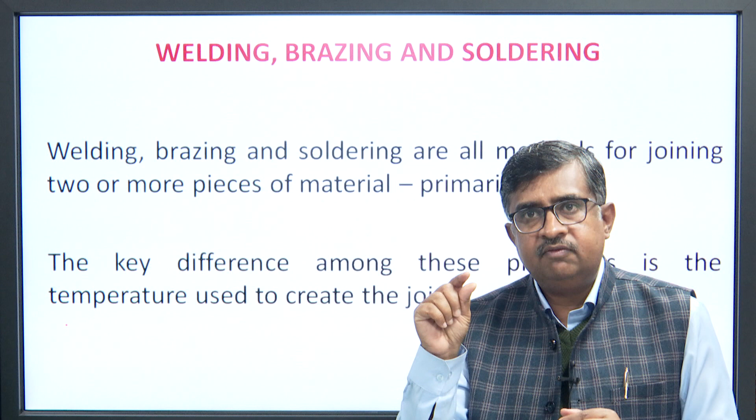So how is welding different from brazing and soldering? It all depends on the type of material we are taking, the thickness of the material, and the temperature we are working on.

So we all know welding - what is welding? For the majority of processes involved, welding involves melting of the base material to create a joint. Welding may or may not involve the use of filler material, or it may use shielding gases as and when required.

Whereas in brazing and soldering, the essence is the same in that they both melt the filler material - like braze and solder only - not the base material. So this is the basic difference, not the base material.

The liquid filler material wets the base materials through capillary action. When the liquid filler material solidifies, it bonds the base material, creating a joint. Remember, in welding we use filler materials or shielding gases; here nothing like that - through capillary action we do this brazing and soldering, and when it solidifies, it bonds the base material and creates a joint.

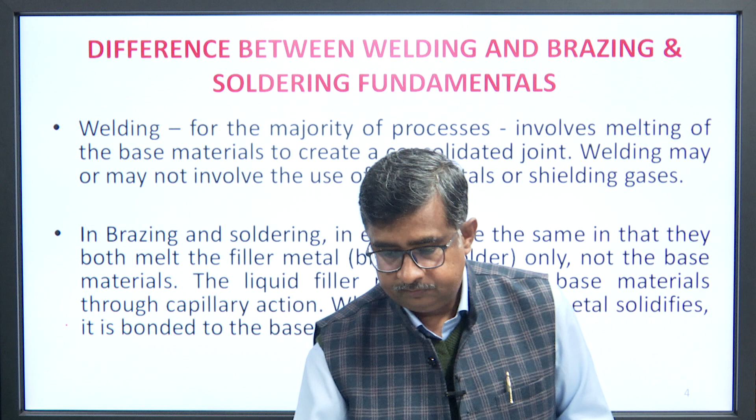So I already said this is a low temperature method of joining two materials. So regarding the temperature range of welding, brazing and soldering - when you see that scale, you will understand the difference in temperature range we follow for soldering, brazing, and which range we follow for welding.

Solder alloys with melting temperature below 840 Fahrenheit are considered soft, and any soldering done above 840 Fahrenheit is referred to as brazing or hard soldering, also called silver soldering when a silver alloy is used. As for welding, the processes occur much higher up on the scale, at more than 5000 Fahrenheit and up.

Students, you have to remember that on a temperature scale there is a large difference. Brazing, soldering and hard soldering depend on temperature. For higher temperature we say hard soldering, which is nothing but brazing, but when you go above 5000 Fahrenheit, then it is welding. So you have to choose the particular material which can come under this section.

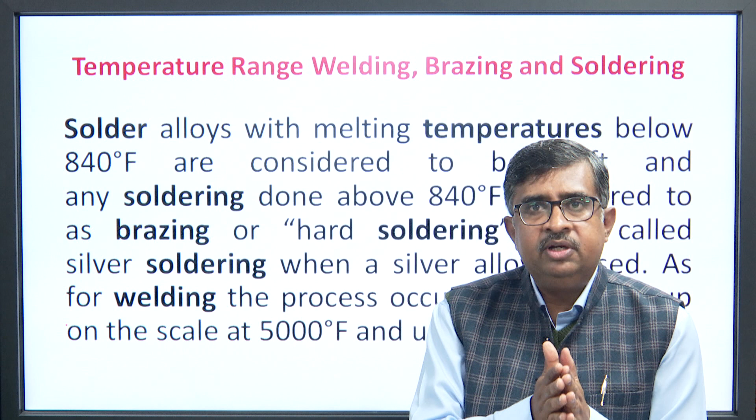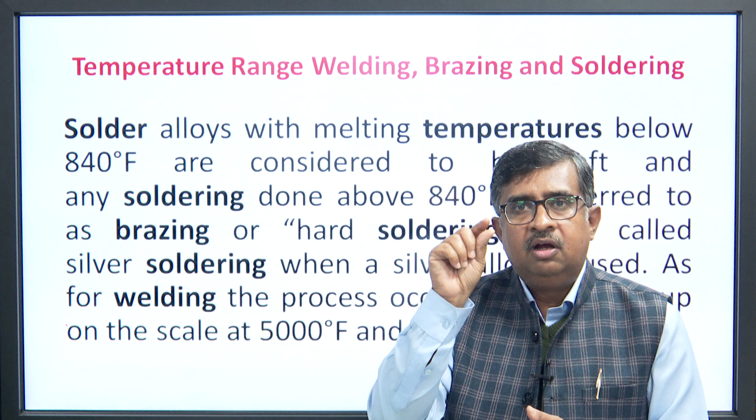When I say it is a low temperature phenomena, this low temperature joining phenomena means you will take thin sheets and then do the welding. For your understanding, you must have seen radios or TVs, PCB sheets in which microchips, capacitors, resistances are joined. So when you are joining that capacitor, you are basically doing hard soldering or soldering, whatever type of component it is.

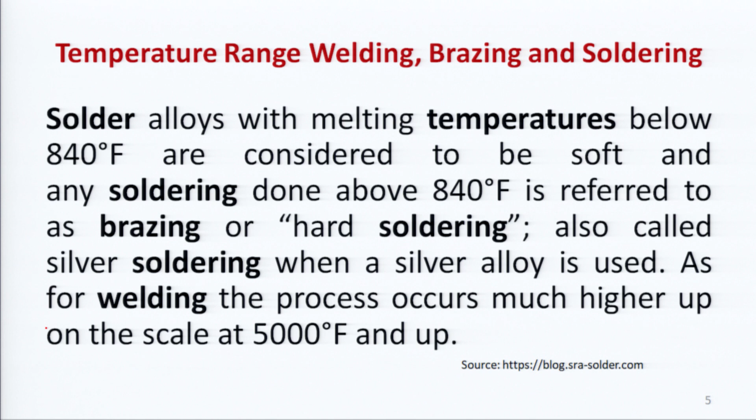So the application - just for your understanding purpose I have taken this example, so that you can understand it better. I will show you a temperature scale which will let you know.

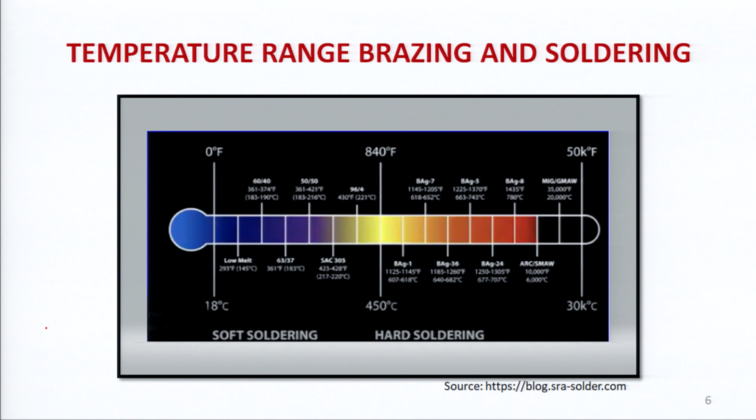And for welding, if you go above that scale, that is 50K Fahrenheit or just near about, it means you are dealing with very high temperature, and that will be the portion of welding, which is on a scale you can easily understand. So, that is a major difference.

When anybody asks you what is soldering, brazing or welding, what is the difference, you have to tell that the basic is the thickness of material. The difference is that you take thin materials in that, and definitely the temperature scale what I have shown is the major difference between welding, brazing and soldering. In fact, brazing and soldering lie in one family and welding lies in a different family.

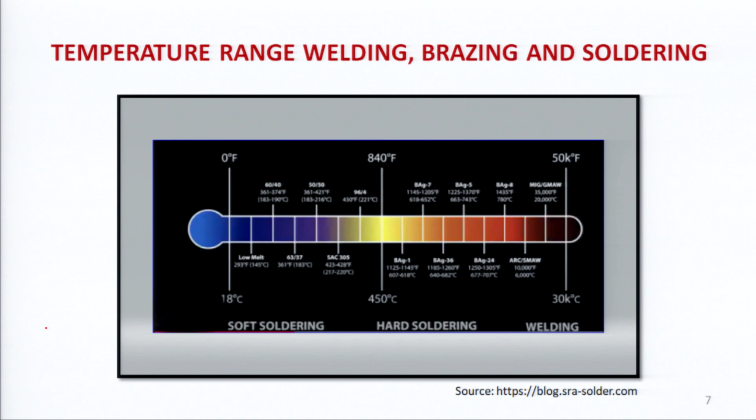So, what is soldering, or how we can understand soldering, and what we have to do? Students, solders are melted using heat from a temperature controlled soldering iron. The solder melts at a temperature below 450 degrees Celsius.

A flux is used in soldering to clean the metal surface, allowing easier flow of the liquid metal over the base metal. So, whatever base material you are working on, the liquid flux is used, so that the upper surface of the material can be cleaned.

Base material suitable for joining by soldering include brass, copper, iron, gold and silver. Filler materials used in soldering were once lead based. However, regulations are there nowadays. Lead base has been replaced by non-lead versions, which may consist of bismuth, copper, indium, tin and silver. So, because of the hazardous output of these lead based fluxes, we have replaced it.

And nowadays these materials, like bismuth, copper, indium, silver, tin, are used according to the application we are doing. If it is a very sophisticated soldering, and it is part of a very sensitive part, then silver soldering is used. It depends on the type of application we are doing.

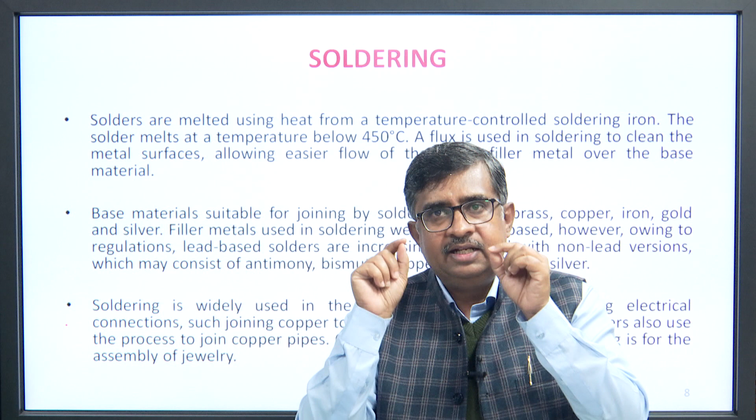So, soldering is widely used in electronics industries, I already said, for making electrical connections such as joining copper to printed circuit board PCB. That is one thing I think each student must have seen in his life, that PCB board, that is the green board on which different components of electronics are soldered. So, that is done, and that is again the joining of components or joining of the material, because at the end it is a joining of material only. So, soldering is very very important and effective there.

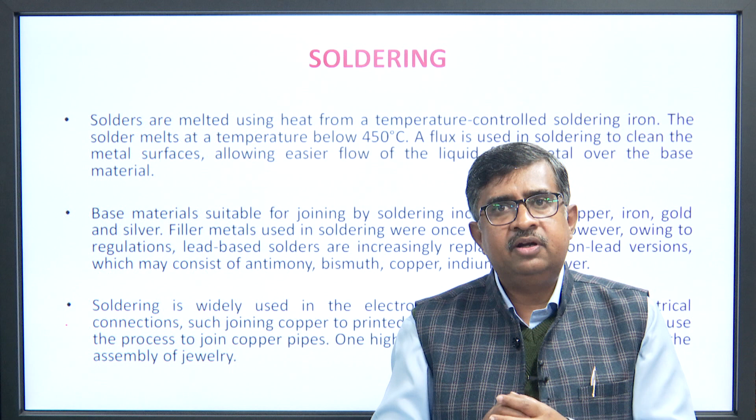Advantage of soldering: having a lower power input and processing temperature compared to welding and brazing. This has an advantage over welding and brazing. You are using low temperature for the process, and that can easily join the component. If you increase the temperature, the chances are there it will spoil the surrounding area where the material or the component is joined. Being able to join dissimilar base material, that is one advantage.

Being able to join thin walled parts, having minimal thermal distortion and residual stresses in joint. Students, whenever we use high temperature, material will undergo a typical type of stresses, that is it may be tensile stresses and compressive stresses when it cools down. So, if you use a very high temperature on a PCB board, then your PCB board will get spoiled.

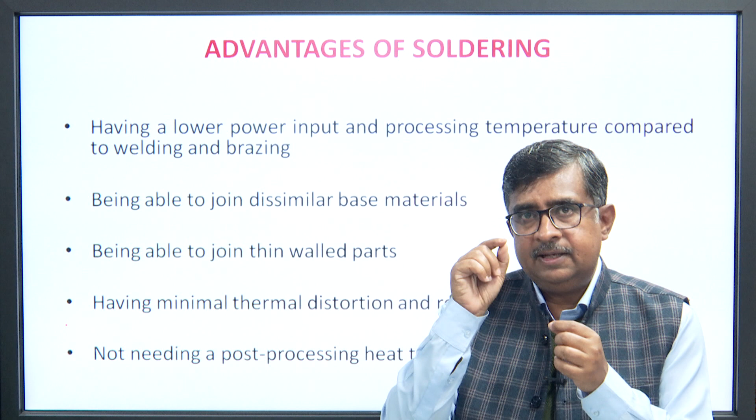So, if we did not have a soldering method, then it could have been difficult for all of us to get those electronic gadgets. Because it is concentrated in a very small area where the component welding or soldering or joining is going on, it has the least effect on other nearby parts.

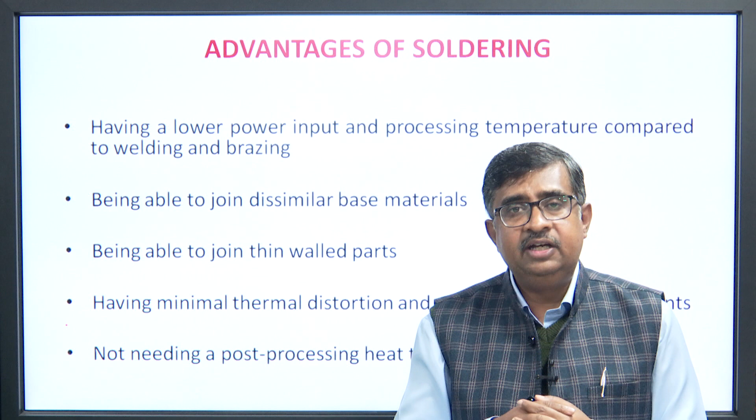Not needing a post processing heat treatment. So, we do not need these things after doing the soldering. So, these are the advantages, students.

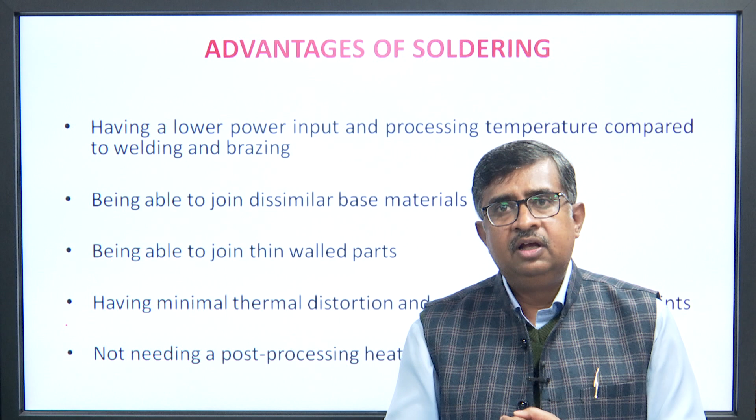There are disadvantages too, because everything which has some positive also has some negative aspects. Producing lower strength of joint compared to welding and brazing, making them undesirable for load bearing applications.

I already said that it is only concentrated to a very confined area where the two materials are joined, where the component is joined with the help of soldering. So, if you apply a load, suppose that PCB circuit, you are having a resistance soldered on it, so if you start moving it, it cannot bear the load. That is the disadvantage of soldering.

It may break, or sometimes if high temperature or high current goes into that PCB circuit because of some wrong connection, then definitely that component, because of that intense heat, breaks or fails.

So, it has a very less load bearing capacity. It is not able to join large sections, you have to concentrate on a very small confined area. It produces joints that are unsuitable for higher temperature applications.

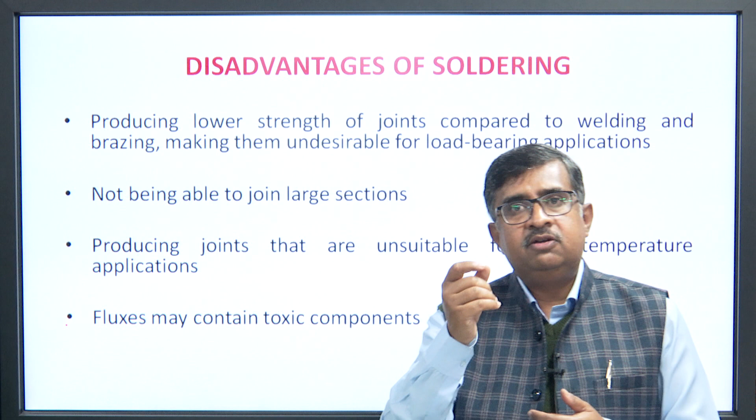I already gave the example that if a high current, due to any reason, goes into the PCB circuit, it may spoil the circuit. When I say spoil the circuit, it spoils the welding joints, the soldering joints, and because of this reason, suppose the cost of that PCB circuit is very high, it will spoil the whole equipment.

And fluxes may contain toxic components. Earlier we used to have lead type fluxes, and when we use lead type fluxes, it was toxic. So sometime or other, if we are using lead type fluxes, it will be a disadvantage for our health. Now new fluxes have come, and we can replace those lead fluxes with them, but it increases the cost. So remember students, these are the disadvantages of soldering.

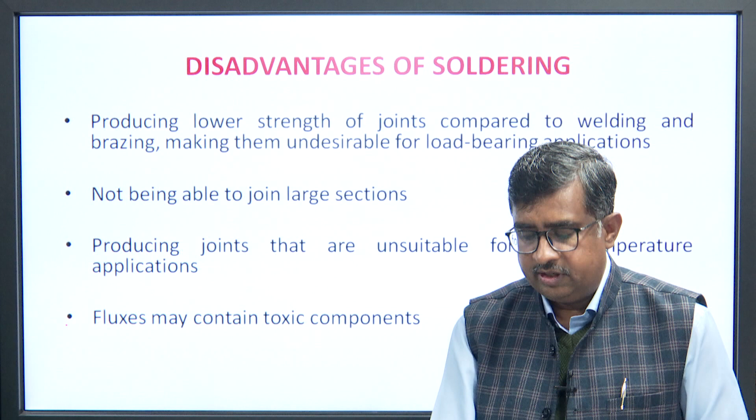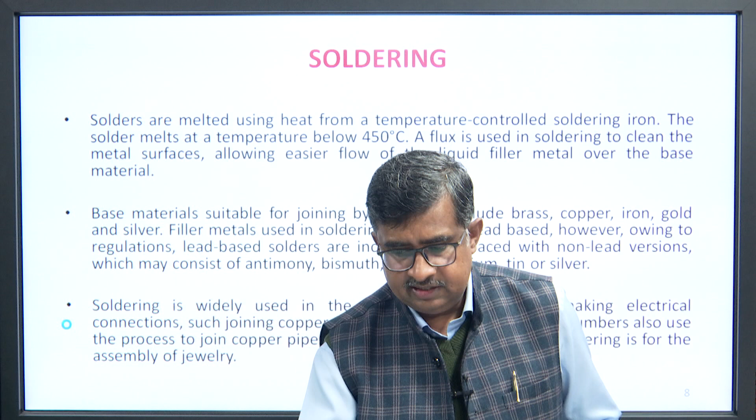Now, how is brazing done? Brazing is considered as a high temperature version of soldering. When I showed that temperature diagram earlier, I showed hard soldering in that slide. So brazing is nothing but hard soldering done above 840 Fahrenheit.

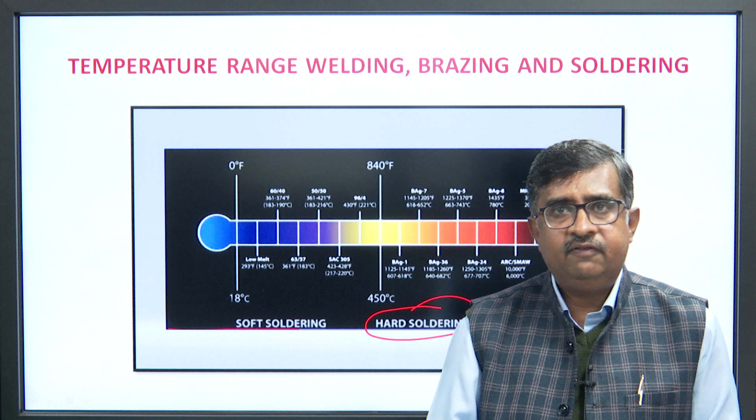I will quickly come to my slide. So, brazing is considered as a high temperature version of soldering. There are several brazing variants, including torch brazing, vacuum brazing, furnace brazing, and induction brazing. Regardless of the type of braze, filler metals melt at a temperature above 450 degrees Celsius, but always below that of the base material to be joined.

The filler metal, while it is heated slightly above the melting point, is protected by a suitable atmosphere, which is often supplied by the flux, as with soldering, which also helps clean the metal surface. Base materials suitable for brazing include aluminum, copper, gold, nickel, silver and steel.

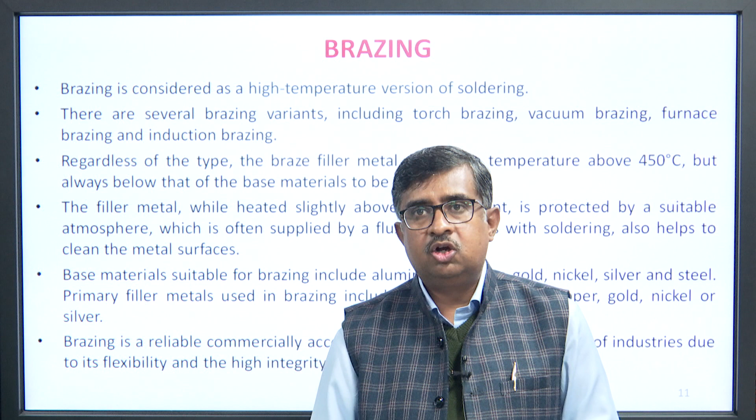Primary filler materials used in brazing include aluminum, cobalt, copper, gold, nickel or silver. Brazing is a reliable, commercially accepted process used in a wide range of industries due to its flexibility and higher integrity with the joints that may get produced.

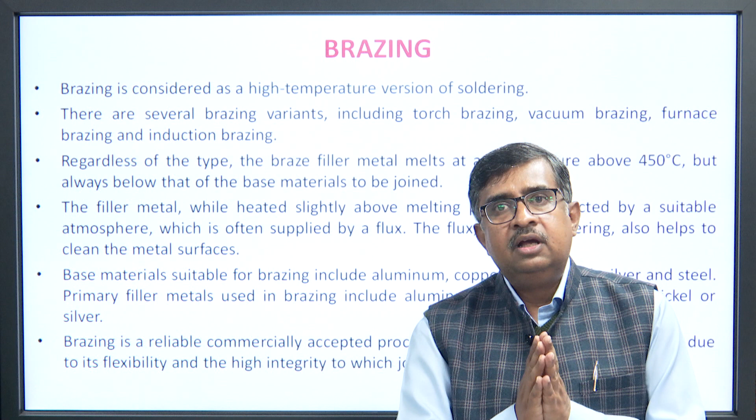So remember, when we do soldering, it is concentrated to a very small confined area, to one or two components, but those joints are weak. But here, when you work at a higher temperature, more than 840 Fahrenheit, or 440-450 degrees Celsius, then brazing is a reliable, commercially accepted process.

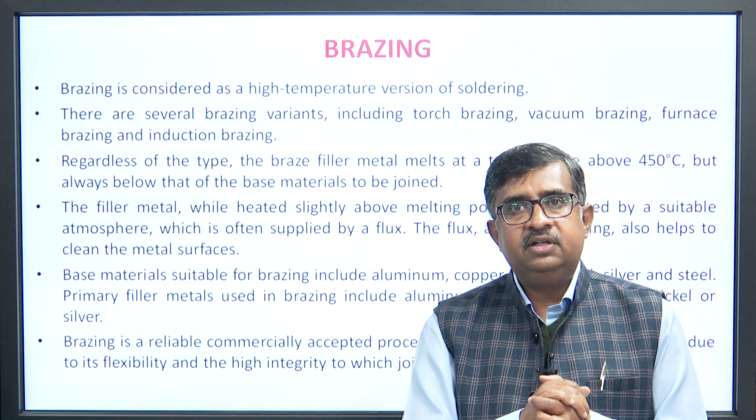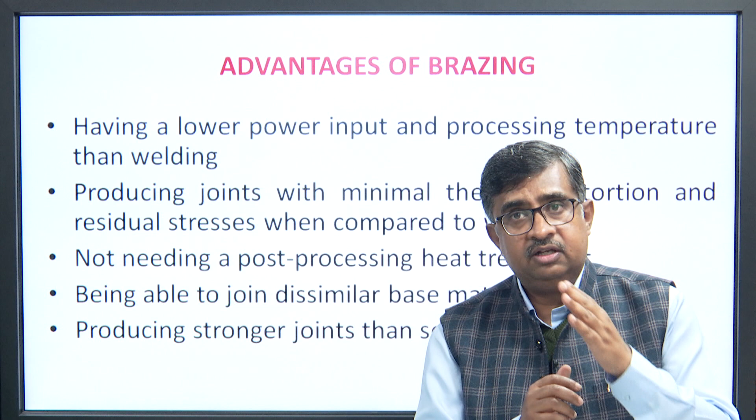It has certain advantages over soldering. Advantages of brazing: students, I have told you that if you work at a very low temperature, then definitely the type of joint produced will be weaker in section, and will fail easily under load. But in brazing, you can have control over this.

Having lower power input, and processing at a temperature higher than soldering but lower than welding, produces a joint with minimum thermal distortion and residual stresses when compared to welding, not needing post-processing heat treatment, being able to join dissimilar base materials, and producing a stronger joint than soldering.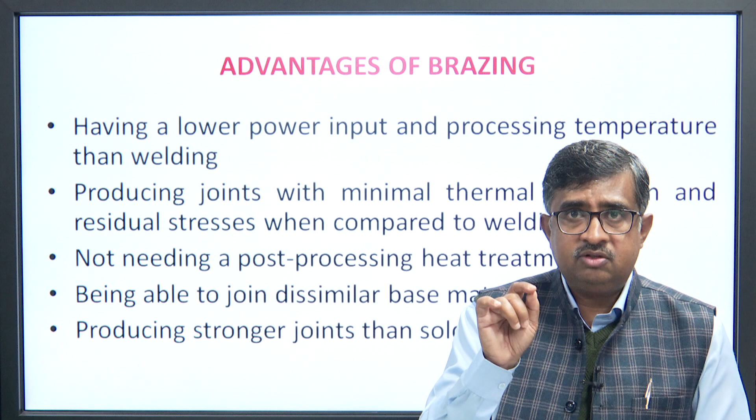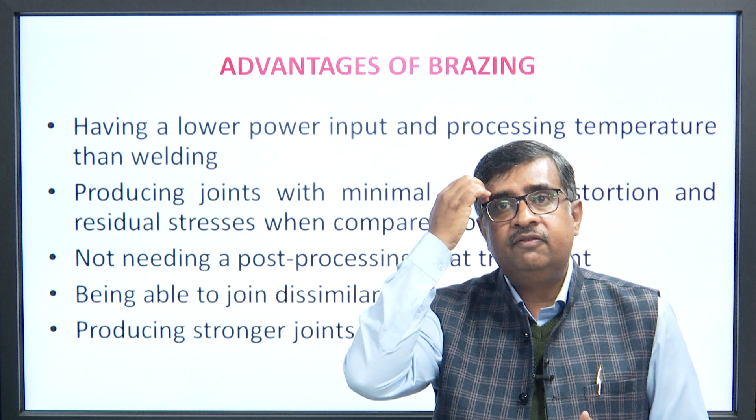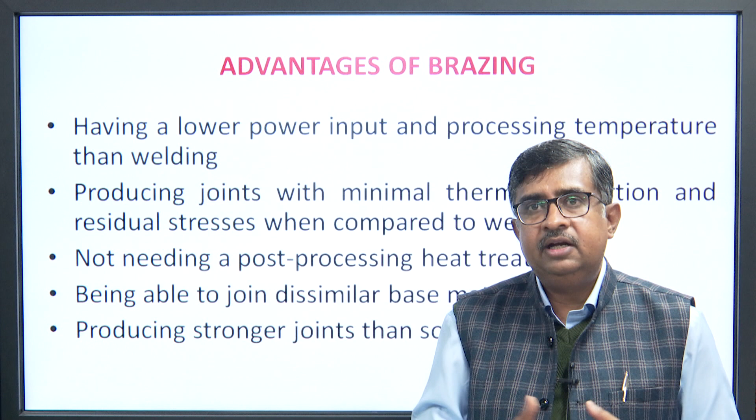That is what I was saying, that is the major advantage of going for the brazing operation. Remember students, it has more applications than just joining PCB components. You can weld artificial jewelries, you can weld decorative pieces. It is also used in many areas of welding, such as refrigeration units, where it is used to weld copper pipes. So seeing these advantages, brazing has an upper hand over soldering.

Disadvantages of brazing: it produces lower strength joints compared to welding. That is because brazing is done at a lower temperature than welding, so definitely the strength of the joint will be lesser than welding. It produces joints that are not as well suited to high temperature applications as welds. Fluxes may also contain toxic components, as already discussed, but these can easily be replaced with non-toxic lead-free fluxes.

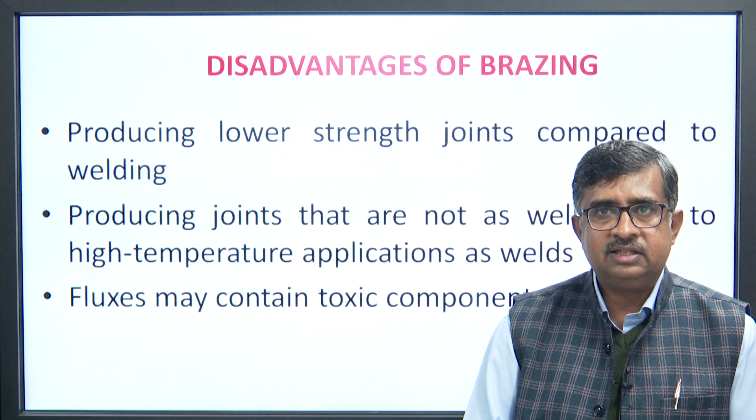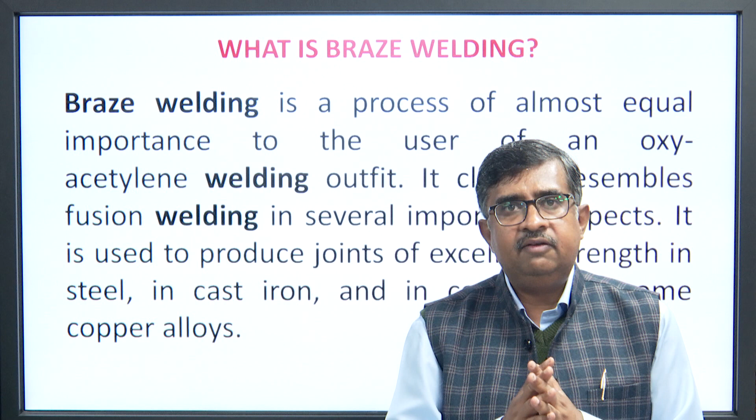So, what is braze? Students, in your syllabus there is one topic known as braze welding. Braze welding is a process of almost equal importance to the user of an oxyacetylene welding outfit. It closely resembles fusion welding in several important respects. It is used to produce joints of excellent strength in steel, cast iron, copper and some copper alloys. So almost similar features, but done at lower temperature.

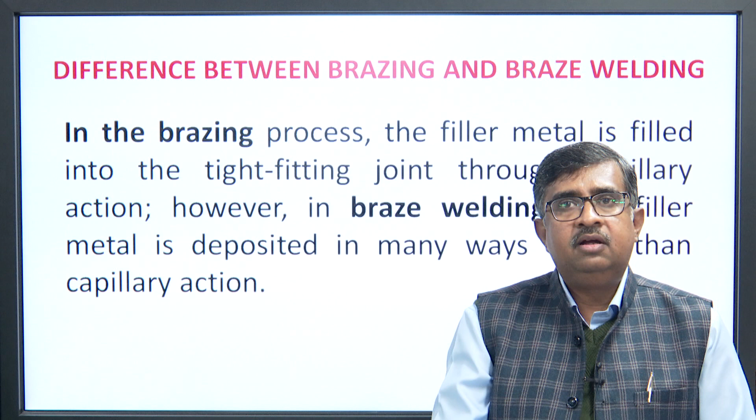The difference between brazing and braze welding is very important to understand here. In the brazing process, the filler metal is filled into the tight fitting joint through capillary action. However, in braze welding, the filler material is deposited in many ways other than capillary action. So this is the main difference. Capillary action means, you must have seen that if you put a pipe in liquid, the liquid will go up. That is capillary action. So this is the main difference between brazing and braze welding.

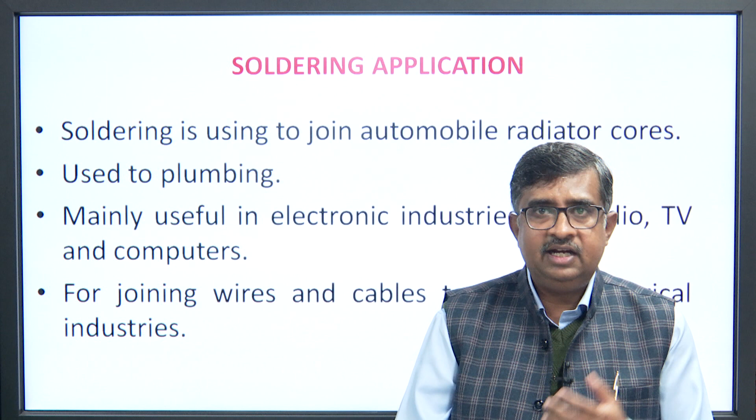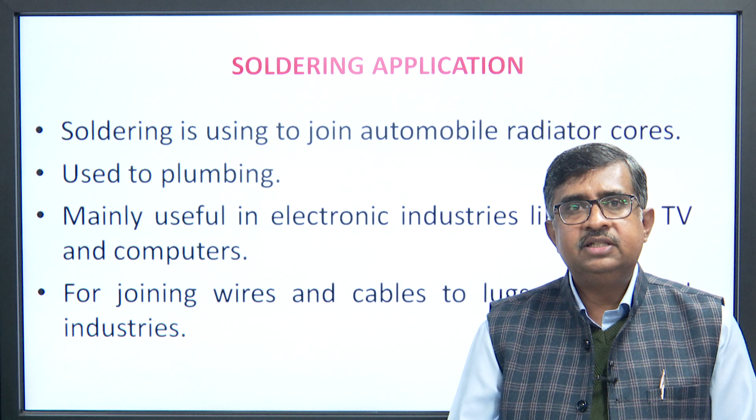Soldering applications are used to join automobile radiators, used for plumbing, many useful electronic industries like radio, TV, computer industries, for joining wires and cables, and electrical industries. So these are the wide applications of soldering which are used in the industry.

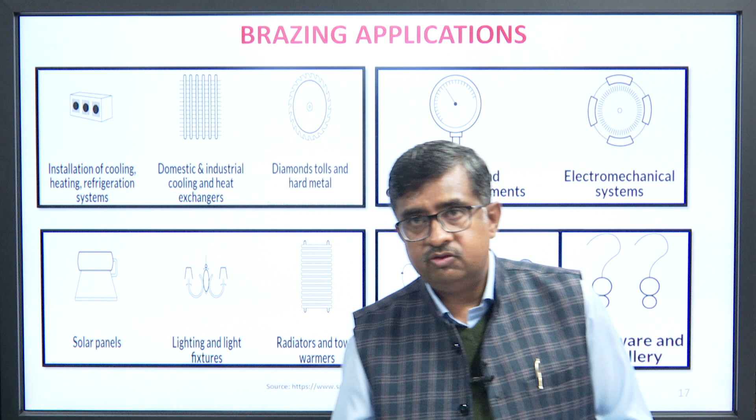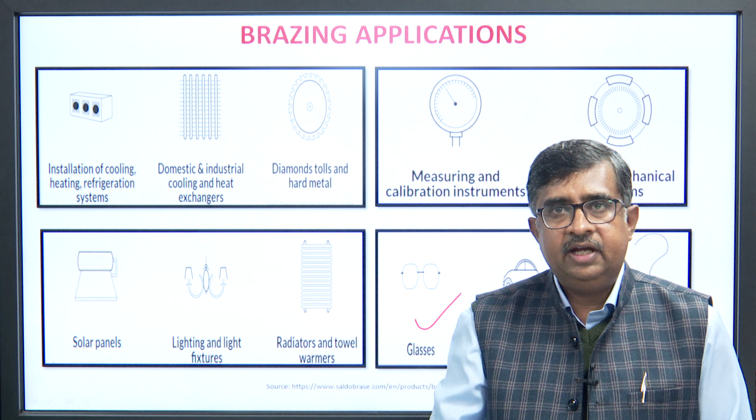So these are the applications of brazing. You may see many uses I have shown. Some of them are solar panels, lighting and light fixtures, measuring equipments, electromechanical systems, jewelry, automotive, and glasses/specs which we wear. So these are the wide applications of brazing.

Underwater welding is an important topic, something different from brazing and other welding, so brazing, soldering, and this is a different topic. It is in your syllabus, so I have to cover it here. Underwater welding is an important tool for underwater fabrication work.

Basically, in the global scenario, you see a lot of oil rigs have come up in the last 20-25 years, and sea activities and ship activities have increased. These are all made from materials that need repairs. When you are developing an oil rig, you need to go deep under sea and weld these things. So underwater welding is done in the same way as whatever welding we have studied, but underwater welding has gained popularity when...

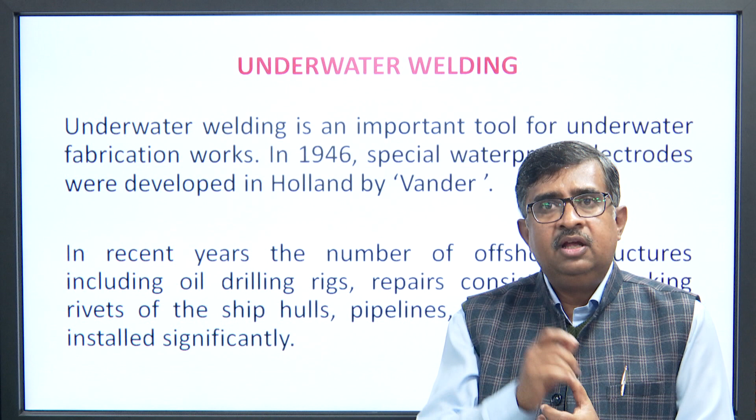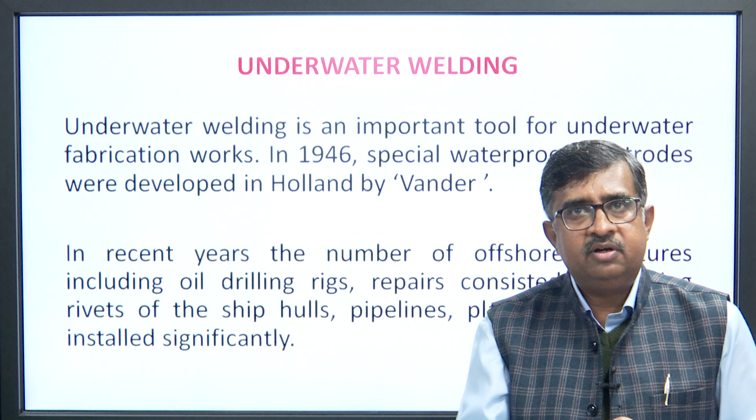...waterproof electrodes came. If you see the technology, students, these underwater welding techniques have been taken up by the industry when these underwater electrodes came, and that happened because of the demand, like oil rigs you have to make in the ocean. So when you have to make these in the ocean, you need to develop a structure, and that is done only by tightening nuts and bolts, and by doing welding. So this underwater welding is a very important topic.

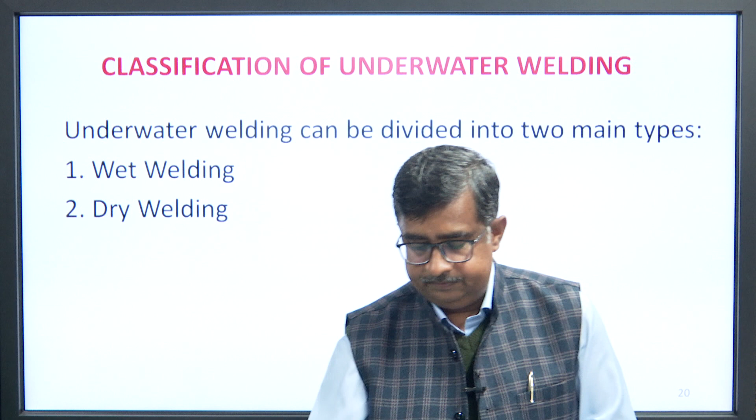There are two types of underwater welding: wet welding and dry welding. The wet welding process is carried out at ambient water pressure in which the weld is exposed to water. This is carried out by a special waterproof stick electrode with no physical barrier between water and welding. This increases the freedom of movement, making wet welding the most effective, efficient and economical method.

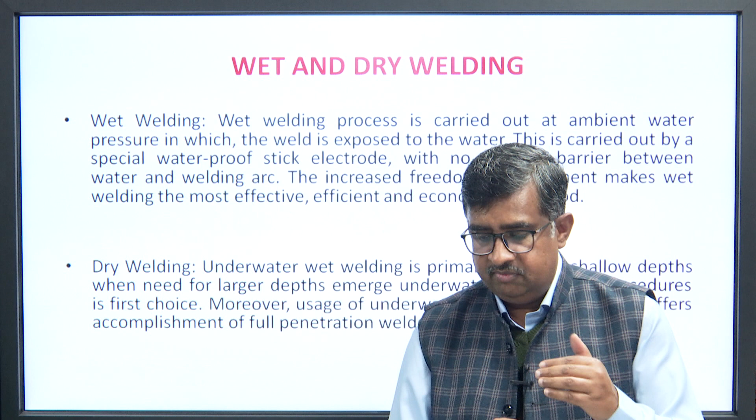Dry welding, or underwater wet welding, is primarily used at shallow depth. For larger depths, underwater dry welding emerges as the first choice. Moreover, the use of the underwater dry welding method offers accomplishment of full penetration welds.

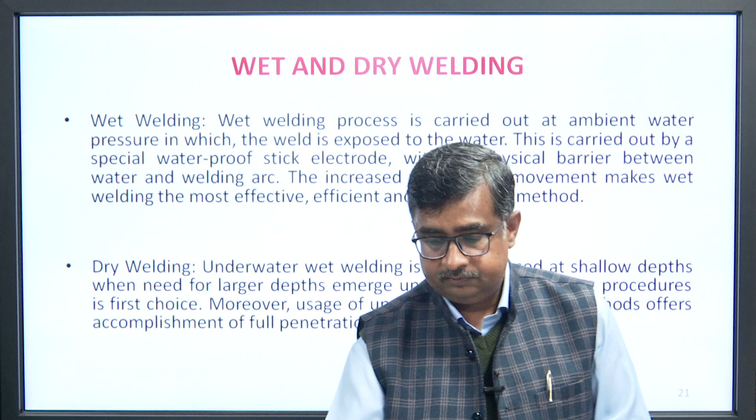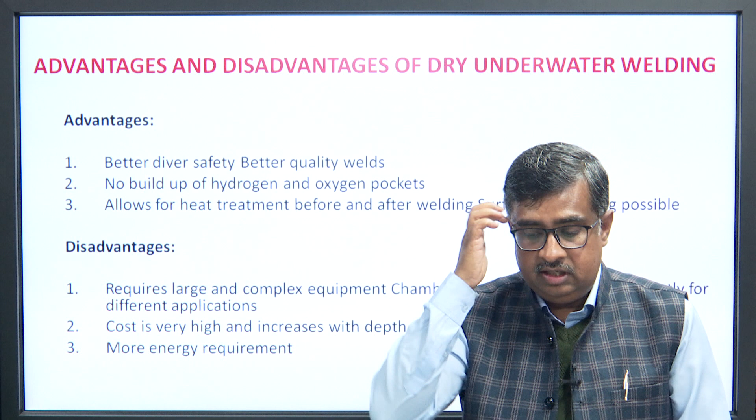So, advantages of dry underwater welding: better diver safety, better quality welds, no buildup of hydrogen and oxygen pockets that is dangerous while doing the welding, allows for heat treatment before and after welding, and surface monitoring is possible. Disadvantages: requires larger and complex equipment, a chamber that goes underwater and has to be fabricated differently for different types of application. Cost is very high and more energy is required.

So, advantages and disadvantages of wet underwater welding: the versatility of low cost welding makes the method highly desirable, it's a fast method, and less costly compared to dry welding. Students, there are certain disadvantages: there is rapid quenching of weld metals by the surrounding water, and although the quenching increases the tensile strength, it has to be taken care of. So these are the different advantages and disadvantages of dry and wet underwater welding, and its application is huge.

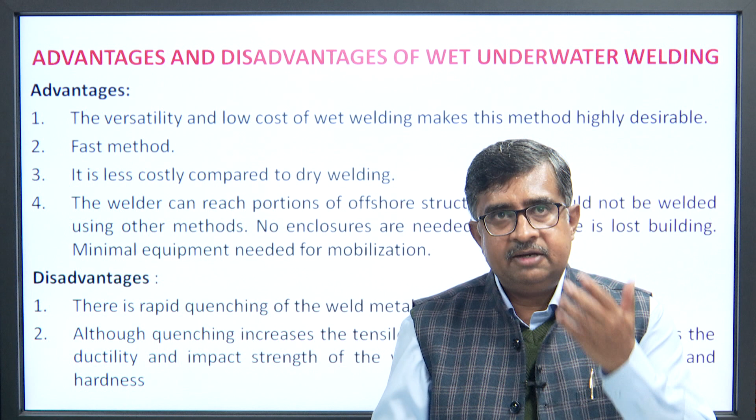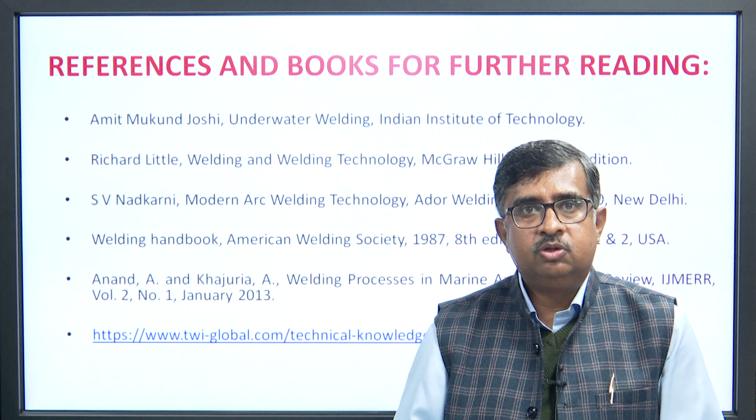So today I have completed two portions: one is soldering, brazing and braze welding, and the second part is underwater welding. Students, I feel you can refer to these books and take advantage of my lecture by referring to these books. So thank you very much, and I hope you will enjoy this lecture.